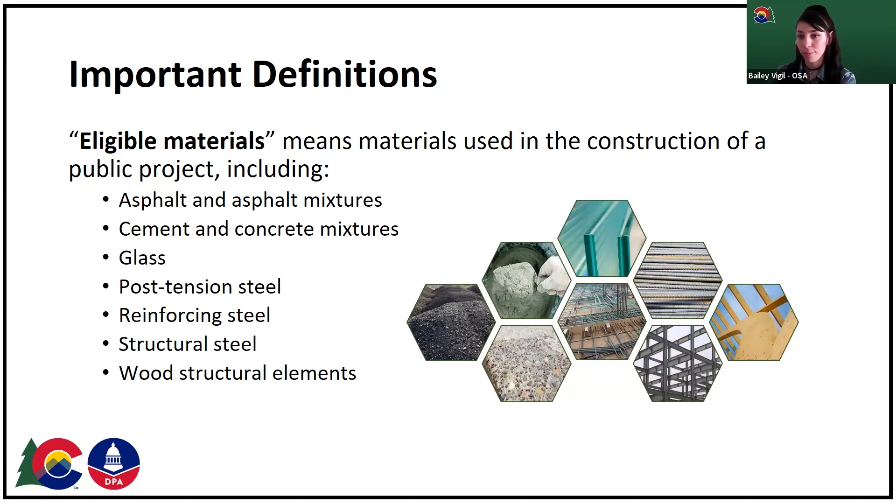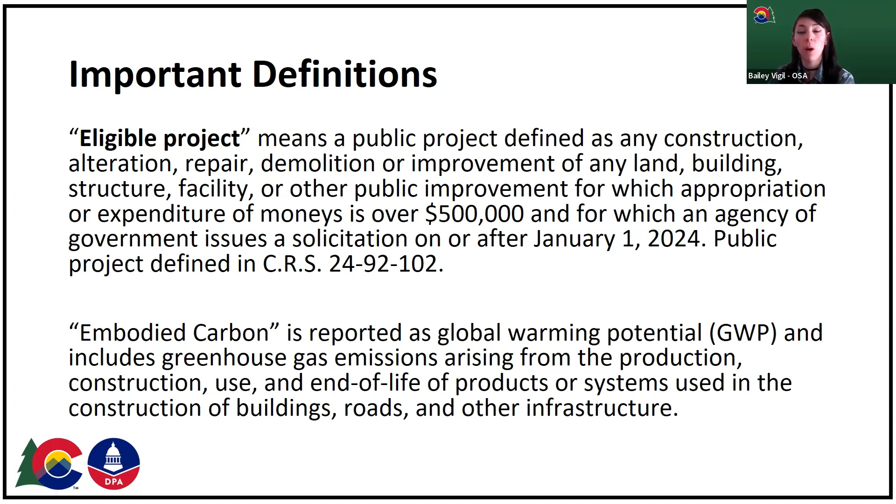In terms of eligible projects, one note that I'll make here is that the solicitation date of January 1st, 2024 refers to the date that each agency or institution has issued a design solicitation. If you have already solicited your design services prior to January 1st of this year, then you are automatically exempted from these requirements. Consultant: just wanted to provide some clarity that a consultant may be an architect or an engineer or any other occupation listed in this statutory definition.

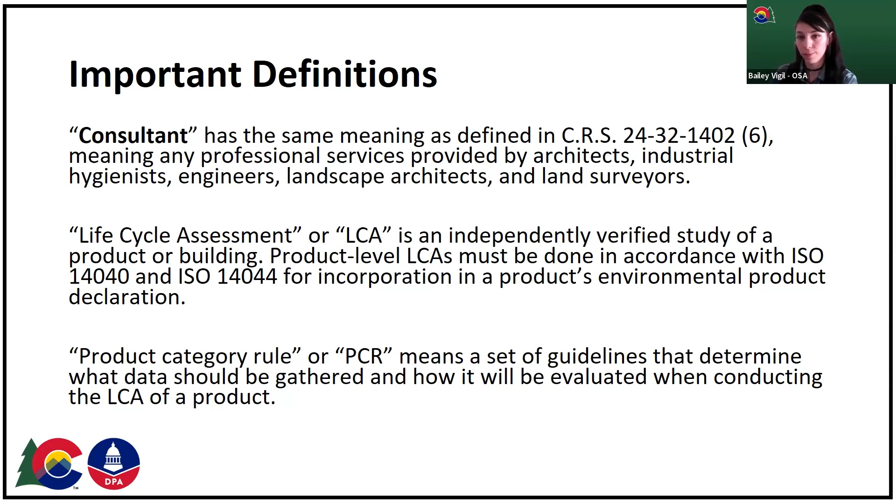Global warming potential, or GWP, represents the embodied carbon intensity of materials. More specifically, the GWP describes the carbon impact that results from manufacturing materials. The GWP is a standardized way to measure the greenhouse gas emissions associated with a product from material extraction through end-of-life disposal. This is a very important metric for the Buy Clean Colorado Act program.

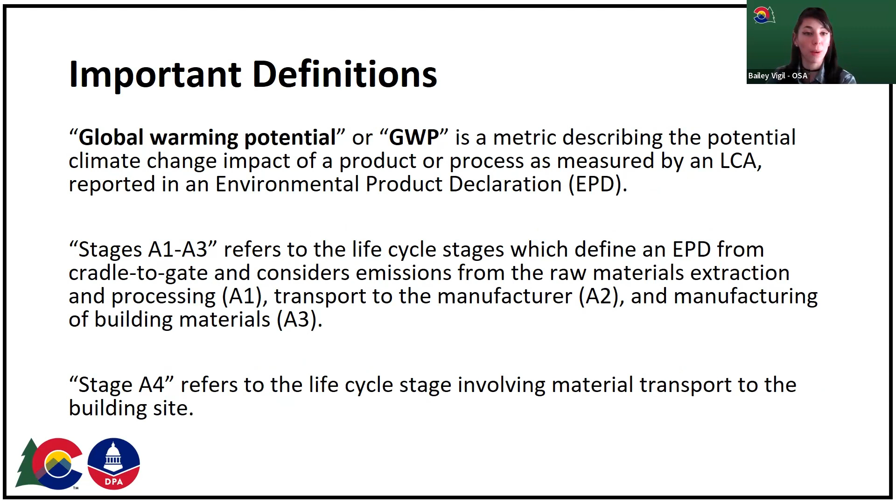Finally, Environmental Product Declaration, or EPD, or Type 3 EPD, means a third-party verified document that summarizes the life cycle assessment, or LCA, of a single product and publicly discloses its environmental impacts. EPDs enable comparisons between products serving the same function. For an EPD to be deemed approved: A, the EPD must be a current product-specific Type 3 EPD. B, the EPD must reference all ISO standards, which are included here. And C, the EPD must align with the applicable product category rule requirements.

So that was our overview. Now let's get into some of the program specifics, such as OSA's global warming potential or GWP limits.

To start this conversation, let's remember why we are all here today. OSA's maximum acceptable global warming potential limits went into effect on January 1st of 2024. Once again, this impacts projects that are greater than $500,000 that begin design solicitation on or after January 1st. Therefore, you are to utilize the GWP limits available at the point of design solicitation.

If by chance in coming years we update the GWP limits while you are under construction, you will not need to update the limits that you are utilizing to match the updated version. Please see document EE 5.1 for OSA's GWP limits. This information is available on the Buy Clean Colorado Act webpage under the GWP limits section of the page.

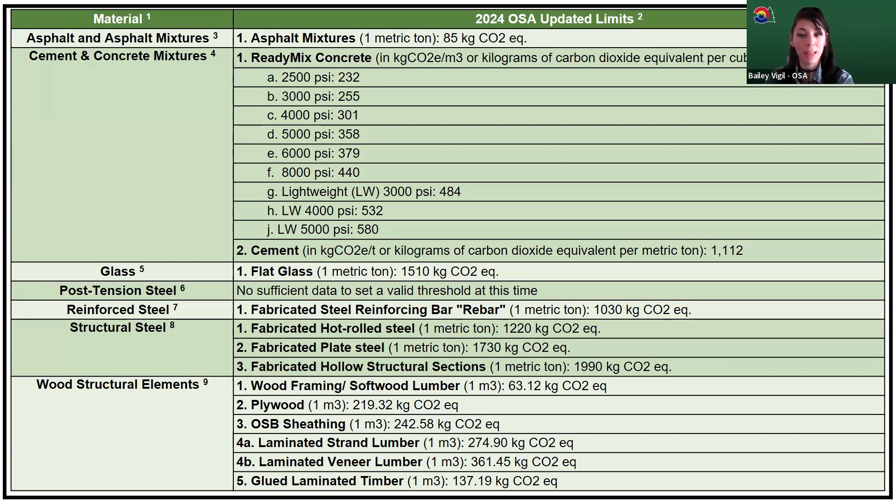Finally, footnote 9 states that these subcategories are based upon available industry-wide EPDs; only consider permanently installed wood products. This goes back to the wood framing idea. If the wood products are not being permanently installed on the site, then we do not need to see an EPD for those products. Please reach out if you have any questions regarding these limits or the footnotes mentioned today.

All of that being said, there are some other material considerations to keep in mind. To start, the asphalt mixtures GWP limit was set a bit high, meaning the GWP limit includes a level of uncertainty and is therefore higher than the industry average value. Therefore, we are anticipating that you should be able to find mixes with EPDs and GWP values that are less than or equal to the GWP limit for this category. However, if this is not feasible, then we can discuss the waiver process.

Onto glass. In addition to there being few EPDs available for processed glass and other specialized glazing products, there are also limited EPDs available for flat glass products. There are more flat glass EPDs available than processed glass EPDs, but there are still only so many, and tracking them can become a challenge. While EPDs may not be available for all glazing products now, we are anticipating that the industry will mature and the lack of EPDs will dissipate. Therefore, you may qualify for a waiver for this category for the time being, but you may not always qualify for a waiver for a product with few EPDs if more EPDs become produced. Reach out if you have any questions when dealing with glass.

Post-tension steel, as mentioned, there is no GWP limit established for this category yet. Therefore, no EPDs are required to be submitted for this category. However, as more EPDs are developed and the industry gains traction in reporting, we will create a GWP limit for this category and EPDs will be required. We will provide updates as to when this will occur. However, it may be relieving for some of you to note that it's not required quite yet.

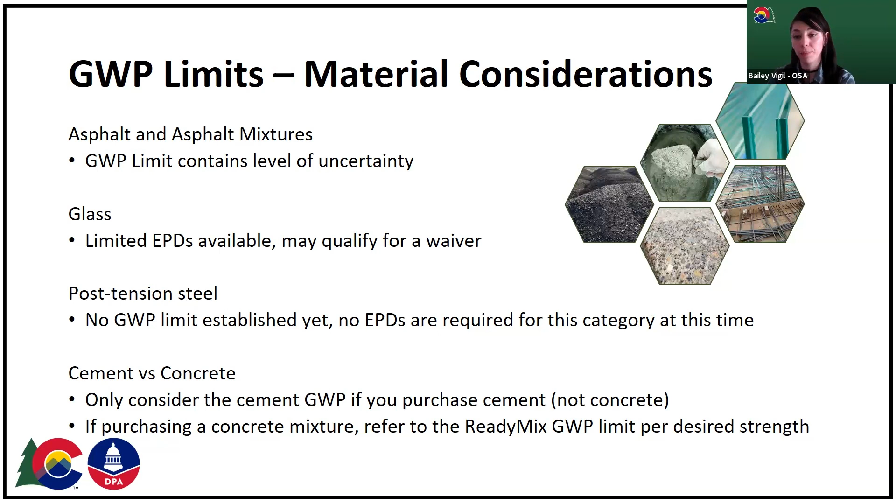Therefore, only consider the cement limit if you purchase cement as is and use it. If you purchase a concrete mixture, please refer to the ready-mix concrete GWP limits per concrete desired strength. Please let me know if there are any questions on this.

On this same topic, let's discuss how to use linear interpolation for evaluating concrete GWP limits between strength categories. This is for concrete strengths between the stated values. You are permitted to use linear interpolation to determine the appropriate embodied carbon limit rounded to the nearest whole number. For more information, linear interpolation is the process of estimating unknown values that fall between known values. The equation is listed here along with each variable and what they mean.

So let's just talk through a brief example. Say that you want to determine the GWP limit for a 3,300 PSI ready-mix concrete mix. The strengths above and below 3,300 PSI are 3,000 PSI and 4,000 PSI. And these strengths correspond with GWP limits of 255 kilograms CO2 equivalent per meter cubed and 301 kilograms CO2 equivalent per meter cubed.

So I took the difference between the GWP limits and the strength categories, 301 minus 255 over 4,000 minus 3,000. That yields 0.046. And then multiply that 0.046 by my desired strength minus my lower limit, plus my lower strength GWP limit, which you can see here, follow along, and it equals 269, which means 269 is the maximum GWP per meter cubed for a 3,300 PSI mix.

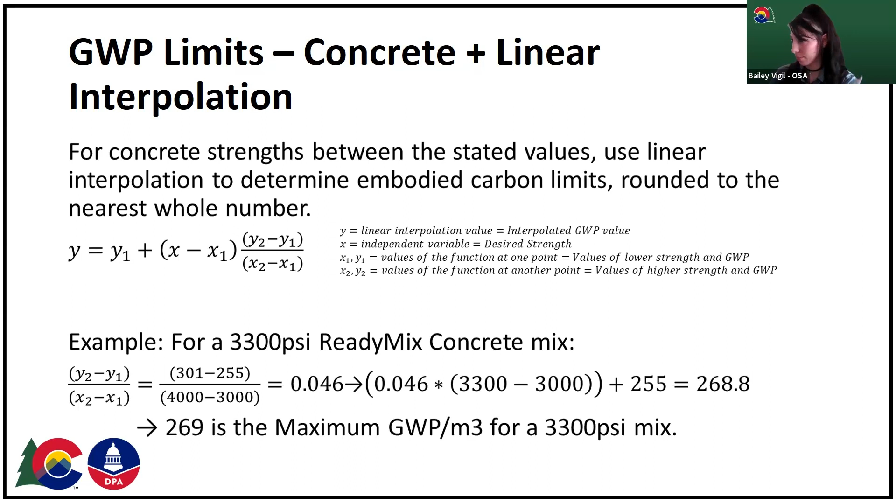Holy cow. Okay, we are making our way through these slides.

The next process to speak on involves the Environmental Product Declaration or EPD process. There we go. So to provide an overview of the EPD process, I'll go through what is expected from the agency delegate, the design consultant, and the general contractor. This process should follow along with the project, but let's start with the agency delegate. Their main function for the EPD process is to pass along the forms to the proper channels, review and sign off on the consultant and contractor entries, and then submit Form EE 5.2 and all EPDs to the OSA during the project closeout.

For the design consultant, they will receive document EE 5.2 from the agency delegate. The design consultant is expected to specify eligible materials with EPDs prior to bid and record those specifications and alternatives in Form EE 5.2. Design consultants are expected to complete the EPD design submittal section of EE 5.2 and submit it back to the agency delegate. From there, the agency delegate will review and sign off on the consultant specifications and then pass EE 5.2 onto the general contractor. General contractors are expected to consider the EPDs needed during the bid.

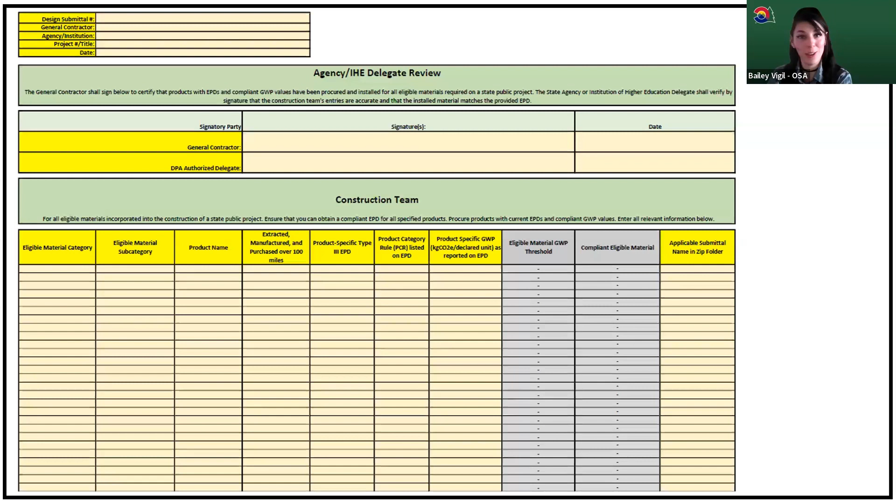As another note, there is a column here titled Extracted, Manufactured, and Purchased Over 100 Miles. This column contains a drop-down menu. If the product has to be transported over 100 miles to reach the project site, then we want to see that information regarding the transport reported in another tab. So let's talk about that tab. The next tab is titled Transportation A4. This is where we want to see the transportation information entered for products sourced over 100 miles from the project site.

The general contractor will be expected to complete this form since they are procuring the eligible materials. There is a section at the top for ready-mix concrete transports. Hopefully you aren't transporting your ready-mix concrete over 100 miles. However, if you are, then we want to see information regarding that transportation here. The information that is expected to be entered is the name of the material, the weight of the shipment, and the distance traveled. The number of trucks will automatically populate.

You can also add information here regarding the original destination and the project destination, although that information will not be used in the calculation. Then the transportation impact will be computed off to the right for each material and summed up at the top for the total project. Additionally, there is a section below for all other materials. For this section, we do permit accounting for multiple trips if necessary. However, this information is quite similar to above. We want to see the name of the material, the weight of the shipment, and the distance.

And the big change here is that we want to see the delivery mode that was chosen. These materials ship by rail, truck, or more. So there's a drop down there to select that mode of transportation. From there, we will just need the distance traveled, and this will compute the estimation of transportation emissions created. If multiple trips are needed, then the emissions will add up accordingly. And as a note, for eligible materials procured over 100 miles from the project site, the distance or mileage is determined as a radius, like in LEED. Please reach out if you have any questions on this tab or if you'd like any assistance understanding it better.

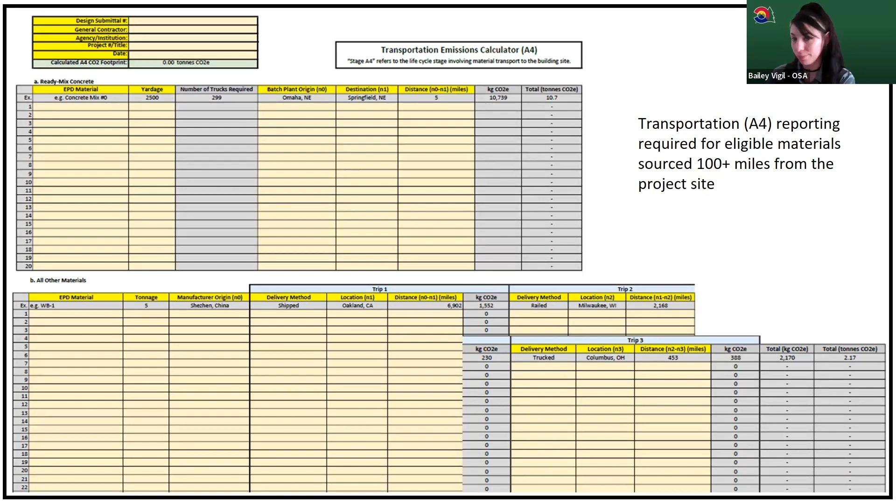Finally, the last tab of importance for you is the final sign-off tab. We are expecting the project information be entered here once again. Then we want signatures from the consultant, the contractor, and the agency delegate with the dates of completion. Please have consultants and contractors sign off here before collecting information from them and moving on to the next step.

So that was a lot of information. Let's summarize who does what. To start, the agency delegate will obtain all necessary forms and pass information onto the proper channels, such as the consultants, contractors, and OSA. They are also expected to review and sign off to verify all entries within Form EE 5.2. The design consultant is expected to complete the EPD design submittal tab with all eligible material specifications. They are then expected to sign off on all necessary tabs.

The general contractor is to collect and organize EPDs for all procured eligible materials. They are to complete the construction portion of EE 5.2, as well as the A4 reporting. They're also expected to sign off on all necessary forms after completing the entries. And finally, the big one, contractors are expected to submit EPDs in a zip folder and the EPD submittal form to the agency delegate for final review and sign off. Please reach out if you have any questions.

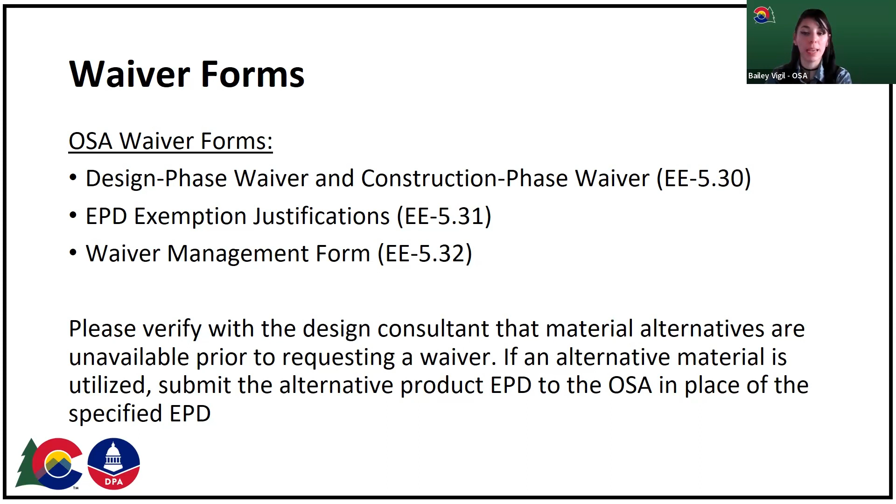Therefore, we are expecting you to submit all requested EE 5.30 forms and one EE 5.32 form with a list of line items for all requested waivers. This information is due from the agency delegate during the L1 code compliance phase of the project.

The waiver exemption justifications are listed here. This information is contained in EE 5.31 and goes into more detail about what types of instances these justifications may apply to. As an example, if providing an EPD for an eligible material would be technically infeasible, then one will not be required or waived. This may be approved if the EPD is beyond its period of validity and cannot be renewed because the product category rule has expired and has not been renewed quite yet.

As another example, in cases where an eligible material being utilized contains a percentage of reused or recycled material and does not have an EPD, then it may be approved under the justification of reused or recycled materials.

And as a final note for this slide, we have added a new temporary justification, which is that there are no eligible materials utilized in a project. This is for instances where no or zero eligible materials are specified, procured, or installed for the project. This justification may go away in time, but we wanted to have a process in place for these instances. Please review document EE 5.31 and reach out if you have any questions.

However, it wouldn't be a thorough discussion if I didn't show you what the waiver form looks like. This is pretty straightforward. You'll verify that your instance truly qualifies for a waiver by reviewing the justifications listed in EE 5.31. If one of them applies, then you'll want to complete Form EE 5.30. This form will be for both design phase and construction phase waiver requests.